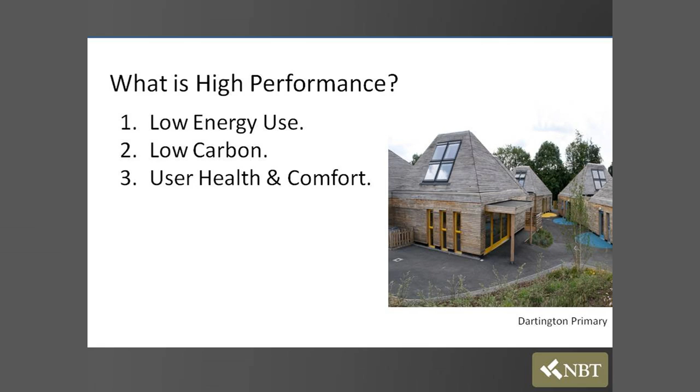So, high performance buildings. Maybe a good starting point is, well, what is high performance? That's a pretty good start. Well, NBT like to think that it's about low energy use, it's about low carbon, which we're kind of familiar with, but also user health and comfort, which often seems to be completely off the agenda. Why high performance? Pretty straightforward, as we know: rising energy costs and also legislation, two key drivers that are moving this forwards within our industry.

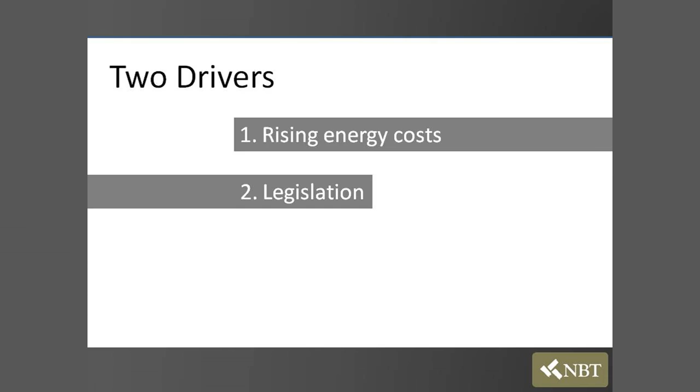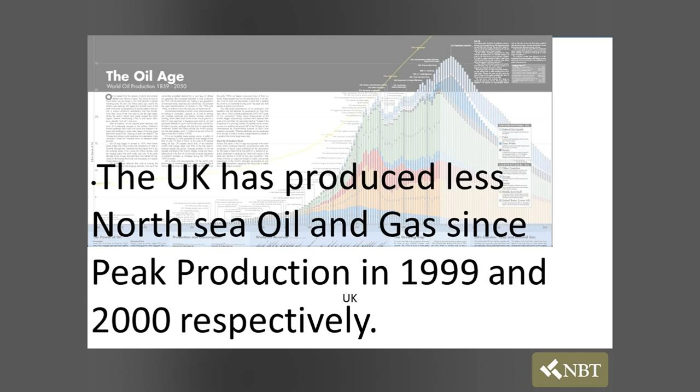Okay, so why rising energy costs? Don't know how familiar you are with the term peak oil or peak gas. So basically the UK has produced less North Sea oil and gas since its peak in 1999 and 2000 respectively. So it's 2000 for peak gas. Since then, we are now net importers of 60% of our gas. It'll probably be about 80% by 2020. Your average fuel bill will probably be 3 to 4 times what it is today by 2020. So a reasonably significant driver. Now fossil fuels deliver 90% of our energy, so it focuses us a little bit more.

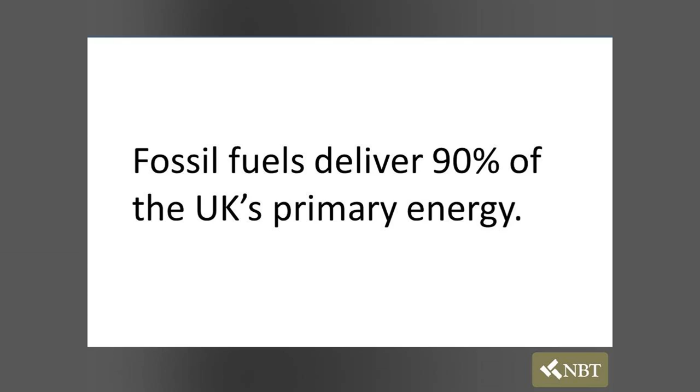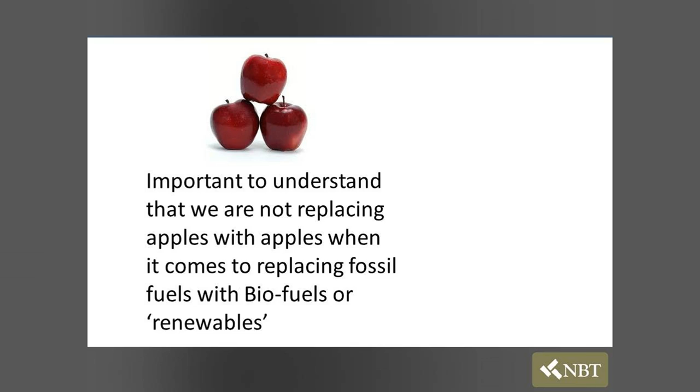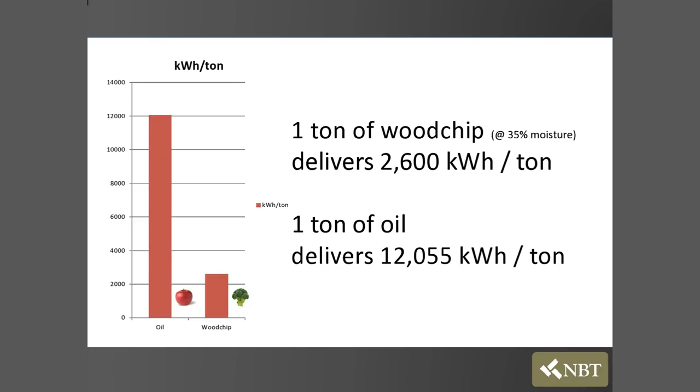But the trick with fossil fuels, and this is the mistake often made, it's important to understand that when we're replacing a fossil fuel with a biofuel, an alternative, maybe a renewable energy source, it's not quite the same as replacing apples with apples. Principal reason, give you a quick example. A ton of wood chip at 35% moisture, that's usually the moisture content of wood chip as it goes into a biomass boiler, delivers about 2,600 kilowatt hours of energy, depending on type or species. Oil's a little bit more per ton. To give you another analogy, the amount of energy in a single barrel of oil is the same as 5 men working non-stop for a year.

So what we need to understand is fossil fuels are incredibly energy concentrated, incredibly energy dense, and that's the trick that we often miss. So actually it's not a simple matter of just switching to an alternative, because there's not that level of concentration out there anymore. It's just a physics fact. It's not a technology issue as such, it's a physical fact because we just don't have that energy in concentrated form. I'll come back to that later.

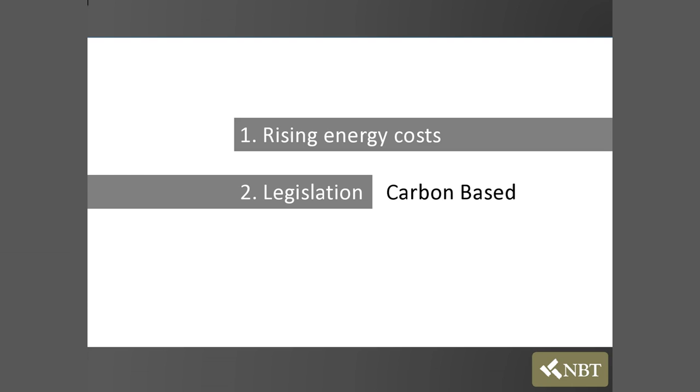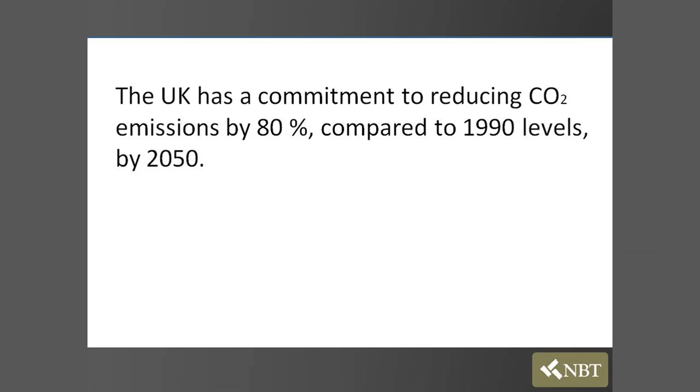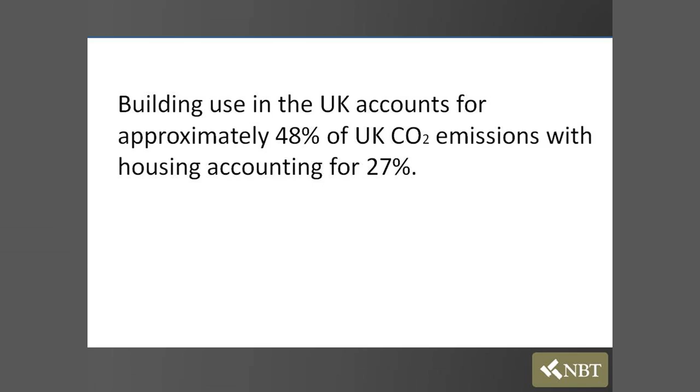Rising energy costs. Legislation: for whatever reason, the government's decided to go for carbon-based legislation, and the reason behind that is we've committed to an 80% carbon reduction by 2050, and we're in fact the only country on the planet that's decided to sign up to that on a legal basis. So we are legally bound, folks, to deliver that by 2050. And because the built environment attributes pretty much 50% of the CO2 into the atmosphere, it's the biggest hit, and therefore it's the biggest drive to deliver on legislation. There we go, 48%, was pretty close.

So we would argue, and I think you probably agree, these changes necessitate a new approach to building design and building construction, and that really we're in a phase of research and development. Now, you guys as architects and practitioners are probably a bit more familiar with thinking of alternative ways of solving a problem, but the reality is the construction industry is actually very conservative. I'm sure I don't need to tell you that. And the idea of change and research and development is pretty limited. The amount of research even on what happens to moisture within building fabric is incredibly limited. And legislation isn't exempt from this.

So BREEAM, SAP, Code for Sustainable Homes, which probably won't be with us much longer, Green Guide, etc. Important to understand, please don't use them as design tools, because they're also very much a work in progress. They're getting us there, they're useful as rough boundaries, if you like, to where we need to be headed, but they're changing all the time. We've seen companies get the rug pulled from under their feet because they've aligned themselves very closely with delivering, say, code 5 or 6, only to find it's changed when we hit the 2010 regs, and it's going to change again when we lose the code altogether. The FIT scheme, the feed-in tariff, is a very simple illustration of that.

The other thing that I'd flag up as well, probably could have done with a different slide on this, but I don't know if you guys are aware of what's called the performance gap. It's becoming more and more of a real awareness issue, which is basically, in simple terms, 50% of our new builds, and that's mainly domestic stock, actually fail their as-designed SAP in real energy terms. On paper it says it'll use so much energy, but in reality, it's failing. By 2016, the government is hoping to introduce legislation that will measure the actual energy performance of a building once it's actually built.

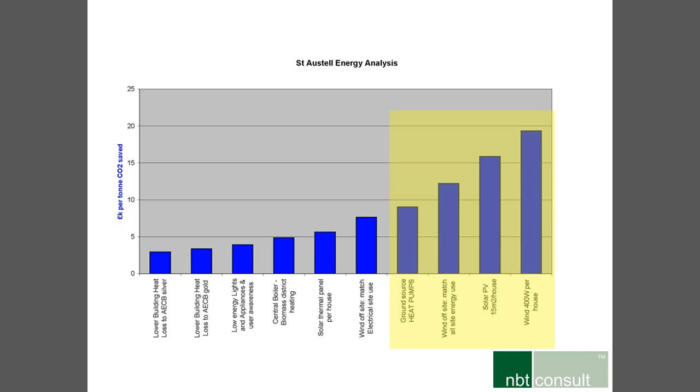Okay, and actually they're the most effective, frankly, at saving carbon. Next to that, low energy lights, user appliances, user awareness, that's a biggie. They don't save the same amount of carbon, but as a cost-effective strategy, it proved itself number three. And then we're getting into the kind of ground source heat pumps, micro wind, which I think most of us are aware of now, unless you're in the middle of a Scottish moorland, is a bit of a dead loss. And even solar PV. This has come down a little bit, but not as much as we think, which is again part of the reason why FIT disappeared.

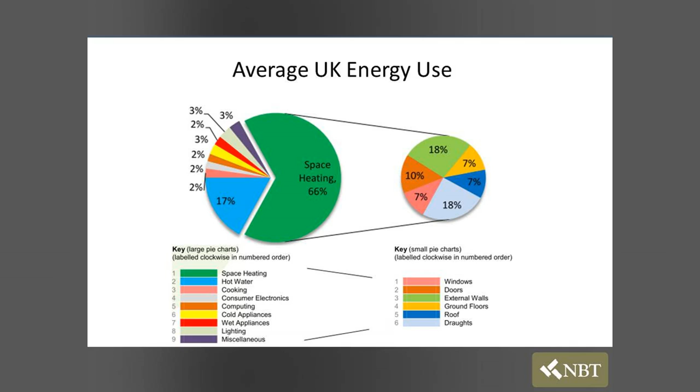Now the reason why those are so effective is simply because of this, average energy use in a domestic dwelling. Okay, so the vast majority of your energy use, 66% thereabouts, is actually space heating. All right. What I always find fascinating about this slide is we're always banging on about low energy lights, but in a domestic setting, actually it's only 3%. That's lighting down there. And of that, there's a further breakdown there. So you're seeing where it's actually proportioned to. So this is air leakage, external walls, so on and so forth.

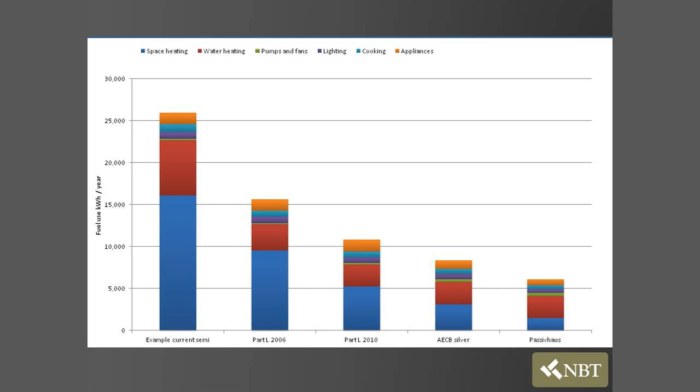And just to give us an idea of putting that in a bit of context in terms of what we need to do in delivering a low carbon strategy, but also really trying to respond to the fact that we need to use less energy, is where we are today. So this is a typical semi-detached property. The blue is space heating, the red is water heating. This is where we were in 2006 building regs. This is where we are today. This is where AECB Silver is, which was that slide I showed you earlier, and this is Passivhaus. So building envelope design, the fabric of the building, the shell of the building, has now become widely understood as the most effective route to low energy design and low carbon design.

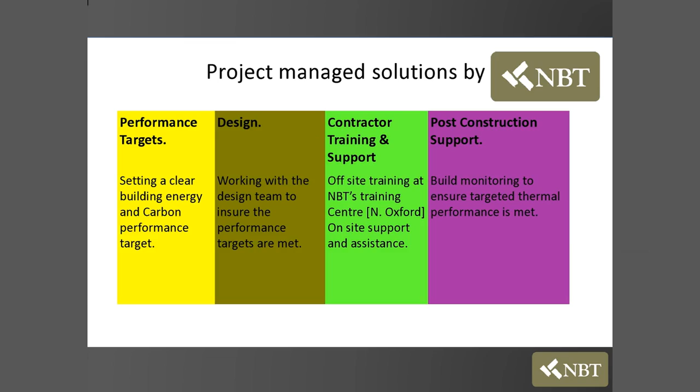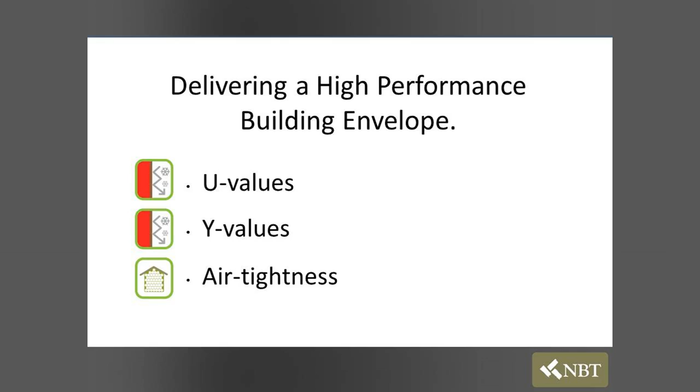So we've banged on about the importance of building envelope. Might be worth just saying what are the key factors to all of this. We think there's probably six as a starter for ten. U values, I'm sure you're familiar with that. That's the principal heat loss through building fabric. Y values, are you familiar with that? It's in SAP more now. It's basically the non-repeating bridging. I'll tell you about that in a minute. Air tightness: we heat the air, the air leaves the building, we lose our heat.

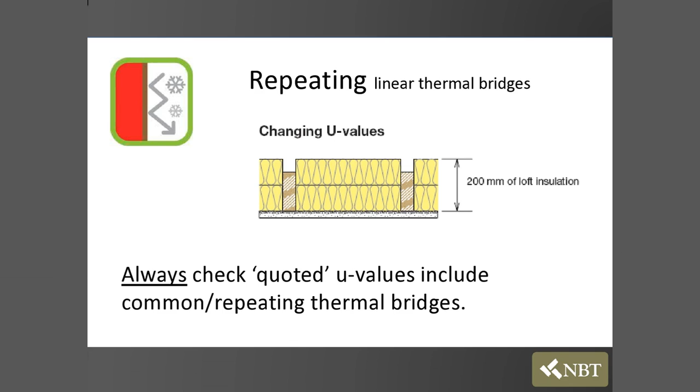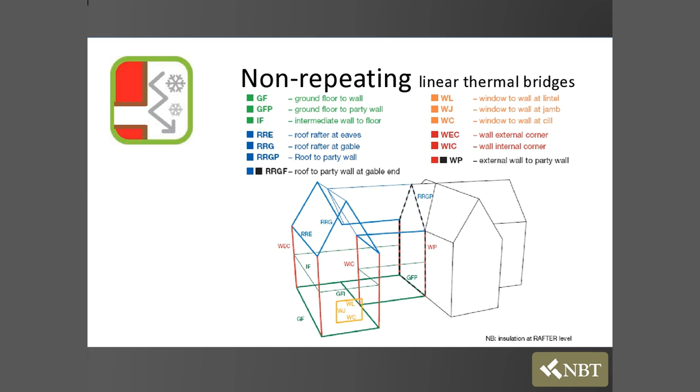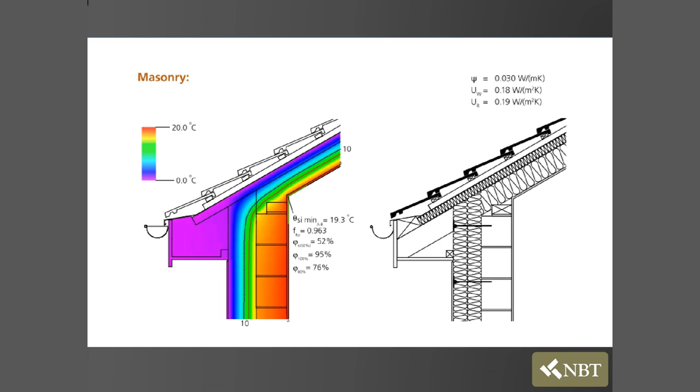Y values. Notional value, it's added to the U value and has become particularly relevant in SAP 2010, and has also, for us, catapulted us from being a little bit more niche in terms of sustainability to being directly competitive in terms of commercial cost viability, and I'll come on to why that is in a minute. These are all the kind of non-repeating bridges where you get junctions between principal fabric, and you calculate the Y value by taking a psi value, which is a two-dimensional slice through the bridging detail, and then you multiply. Actually, I'll come on to that in a second.

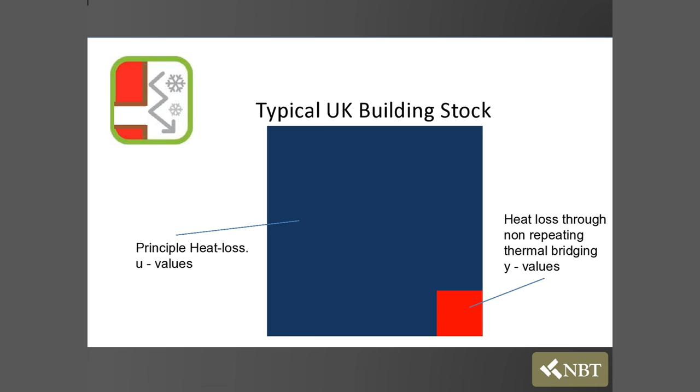The reason why it's more specifically important at the moment is this is the typical heat loss that we used to have. So this was the blue areas, sort of windows, doors, roofs, that sort of thing. The red area down here was the heat loss through the non-repeating bridging. When we get down to even Part L now, the 2010, our principal heat loss is reduced quite dramatically. So proportionally, our non-repeating bridging is suddenly much greater, up to 25% of your heat loss. So we need to now start doing something about that as well.

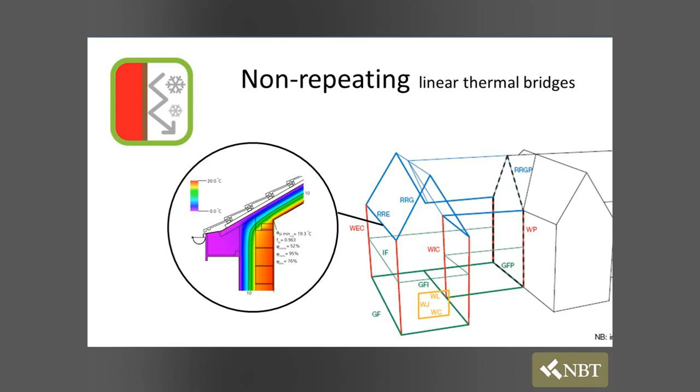And the way we calculate it, to finish my sentence from previous, you take a psi value, which is a two-dimensional slice through a particular junction. You multiply it by the length of that junction, and then you do it with all the other junctions. It takes no time at all. And there you have your heat loss. Ta-da!

So what NBT have done is say, okay, we are providing a system rather than a piece of material. Therefore, we can calculate all this beforehand. And then we can work with you on the design detail to help you understand how that is interpreted within your own design. And as a result of that, you can exploit much lower Y values. So to give an example, Part L at the moment, typical Y value is 0.08. So you're having to add 0.08 onto your overall U values. NBT system can be as low as 0.02.

So if you come to us and say, what's your wall build-up for a 0.2 U value? Well, another way of looking at it is you could actually increase your U value to 0.26 or thereabouts. SAP's a bit funny, so it's not completely exact, but it's thereabouts, because you're using an NBT Y value. So it's that advantage of using SAP in a much more effective way. So you're delivering the same building performance, but your wall has just shrunk in terms of width, which keeps the developer happy because he ends up with more footprint, and keeps the contractor happy because he's spending less money. So as a result, we've become much more commercially viable, rather than just the idea of, oh, it's nice sustainable materials.

I'd just like to say as an aside, the reason why NBT started off using natural, inverted commas, materials is not because they're warm and cuddly, although they can be. It's actually because they've got performance advantages that at the moment synthetics don't have. I don't know if any of you are involved in outdoor pursuits, but there's a product called merino wool, which is used in a lot of stuff like cycling and mountain biking and skiing, which is a brilliant base layer, as in it's the thing that's nearest your skin. It takes all the sweat away very, very quickly.

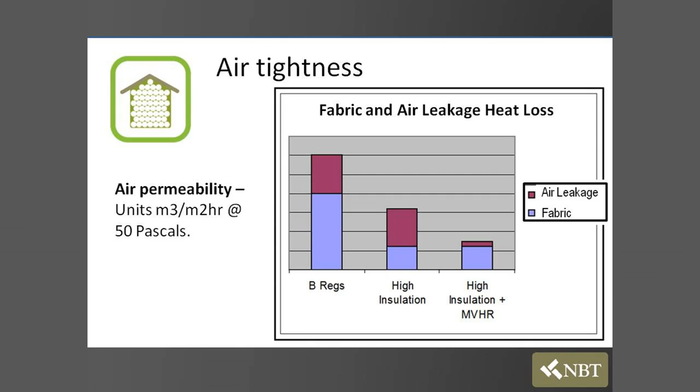to that shortly. Air tightness we talked about. Again, because you're reducing your heat loss, your fabric heat loss, if you don't do anything about the air leakage, then you're kind of beginning to waste your time. So we really need to start driving down the levels of air leakage out of a building.

And these two combined, high air tightness, which we can deliver because it's a system approach, and low Y values means, again, you can help to relax the U values that you've got in your roof and your wall and your floor and even your windows, which are often the very expensive part, to help you achieve the same performance, and we'd argue in reality probably more likely, because it's more of a joined up process, than if you went down the more conventional route.

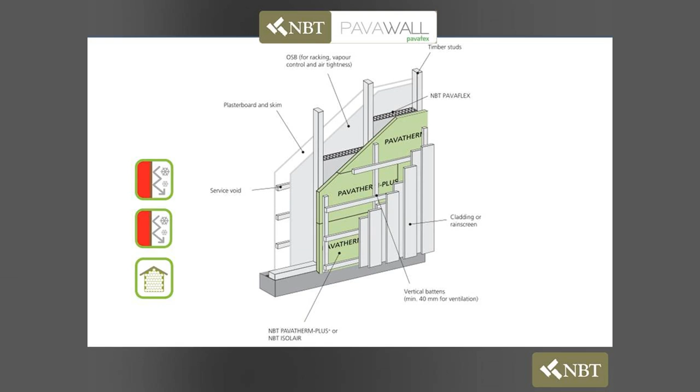That's a typical system. This is PAVAWALL. It has two iterations. It's either on a steel frame or on a timber frame. It's either clad or it's rendered, or you can build a brick facade up the front if you want, but that's unusual. It has all these three performance elements that we talked about, particularly because it has the insulation running over the outside. The boards are tongue and grooved.

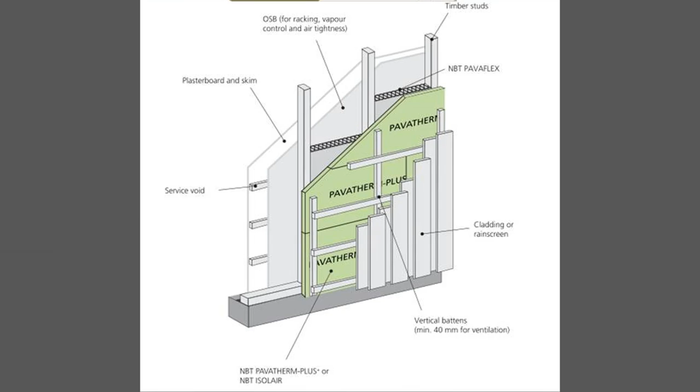They're easier to fit together. The waste is significantly reduced down to about 2 or 3% because of the tongue and groove and the fact that they don't have to hit centers of the studs when you're actually on site producing these. The waste, you can actually shred up and dig into the flowerbeds, which has been attractive to certain contractors in terms of getting rid of landfill.

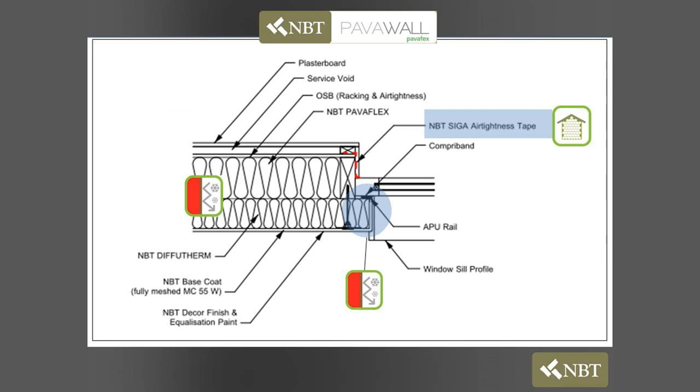And again, details where we're looking at air tightness detailing, principal thermal performance, and the non-repeating thermal bridging. Again, all details that we go through with you. That's the simple bit. Keeping a building warm in winter is generally fairly straightforward, but there's these three other dynamics we'd like to talk to you about as well. Health and comfort, about moisture control within the air that we breathe, fabric durability, and summertime overheating.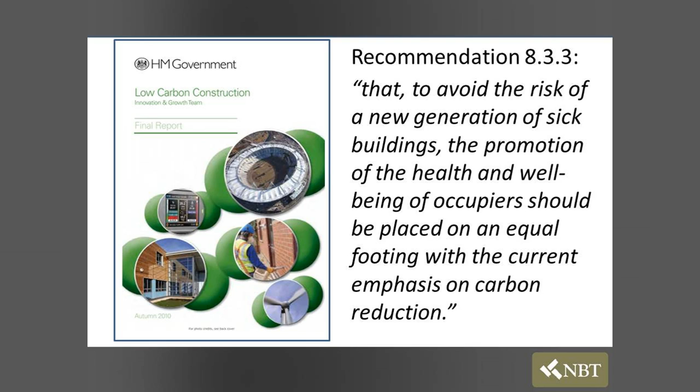There was a government report produced in autumn 2010 that said just this, that a new generation of sick buildings could occur if we don't deal with health and well-being of actually the building fabric and how we're doing with it. Actually, that perhaps this should be on the same level in terms of importance as carbon reduction.

Interesting graph. I'll try and explain it. You've got 0% relative humidity down there and 100% relative humidity over there. So this is the air we breathe right now. And relative humidity is obviously just the moisture content of the air. It's relative because of the temperature. So the lower the temperature, the less moisture in the air.

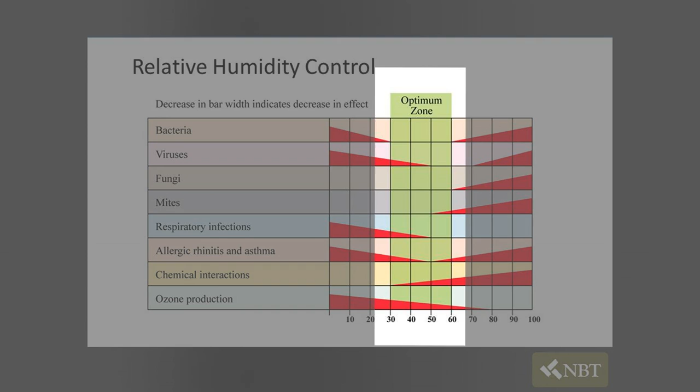You've got various types and species of bacteria, fungus and virus. They generally thrive at either 0 or 100% relative humidity. But they all tail off to almost non-existent at 50% relative humidity. Coincidentally, you and I are most comfortable at 50% relative humidity.

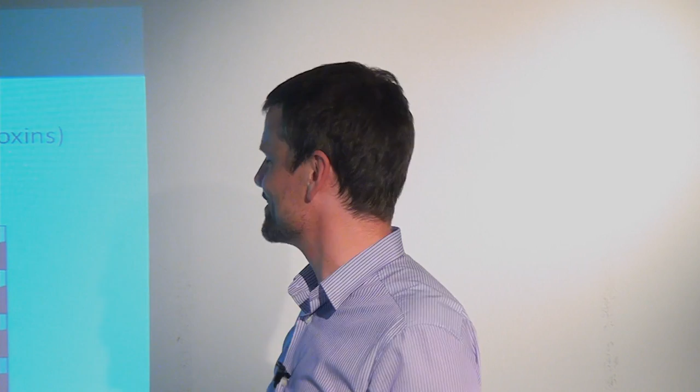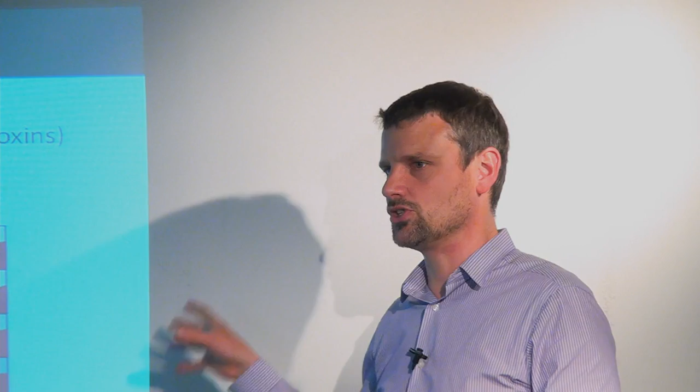Happy days. But it is interesting because suddenly we're switching from the idea that sustainability, so-called, and high performance is all about just low energy bills and ticking some carbon box, to actually producing a building that's far more comfortable to live and work in and far more healthy to live and work in.

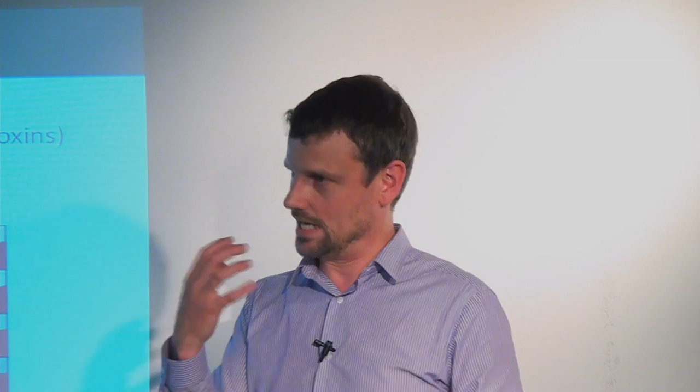We've had guys that join the company and they go into buildings that have been designed as well as this, and they actually change their expression on their face as they walk into the building and go, wow, that's quite something. And they're not looking at anything, it's just the air that they actually feel.

Fabric durability, moisture control. I'll use a timber frame as an example for this. Here we have a timber frame. We've got studs, cross-section from above. We've got insulation between the studs. We've got OSB on the outside. That's to stop the building getting blown over in the wind, for racking.

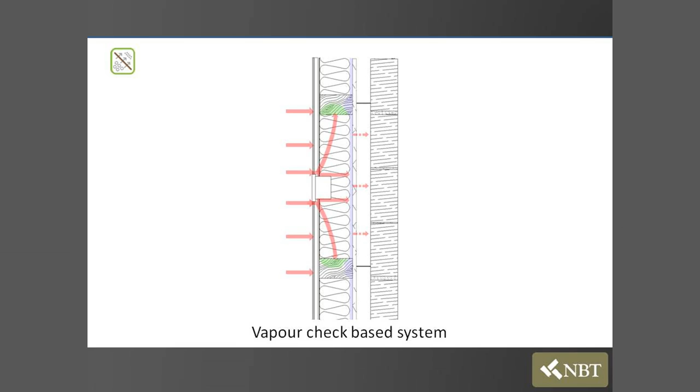Plasterboard on the inside. The moisture comes into the building fabric, and then because it moves through the insulation more quickly than it does through the actual OSB board, we get a build-up of moisture. So we say not to worry. We will line this building with a plastic bag to make sure that the moisture can't get in the first place. And that vapor barrier is, of course, fitted 100% correctly on site, and then it's never punctured in the lifetime of the building.

I'll leave that one to you.

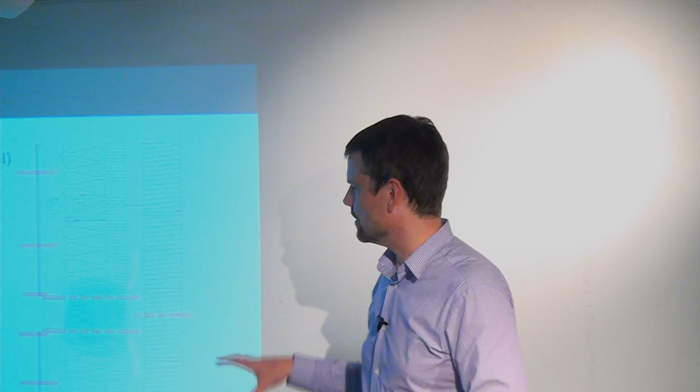What we find is that that doesn't usually happen. So what we really need is a system that allows moisture to get out more quickly than it gets in. So NBT systems, again, allow the moisture to get out once it's gone in more quickly. So in this case, what we do with a timber frame is we encourage getting the OSB board on the inside. You can then tape the OSB board, and that'll actually give you an airtightness barrier, so you're saving on membranes. Batten it out for a service void and then plasterboard.

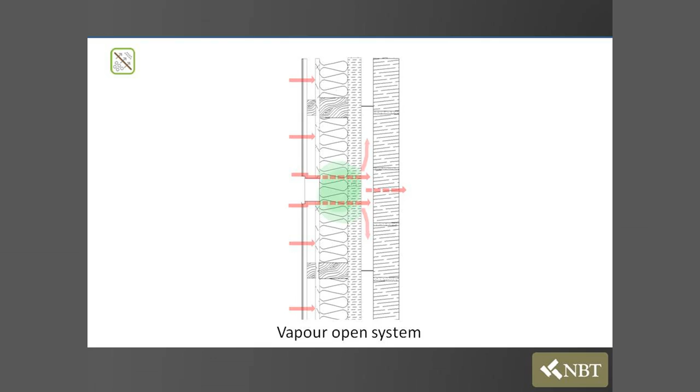You've then got an insulation between the studs, in this case Pavaflex, and then over the top you've got another wood fibre board, which was the tongue and groove we saw earlier. That whole thing is fail-safe for moisture. Okay? You cannot get an excessive build-up of moisture, principally because you have a heat differential between the inside over here and the outside over here. And so long as the least permeable is on the inside and the most permeable is on the outside, you will find that you end up with a vapour open or breathable structure.

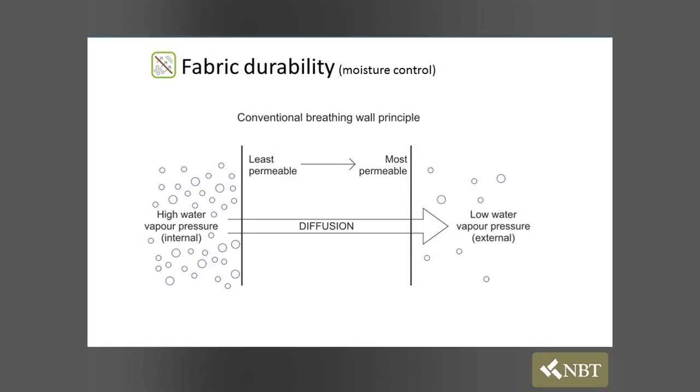In terms of NBT system, I want you to think of it slightly differently than just, look, here's a bunch of materials and you must use them in this order, in this way. It's more about a bunch of principles that we've been talking about here and actually bringing those to bear within a building and making sure the building physics works, rather than just, here's a piece of material, making sure that works.

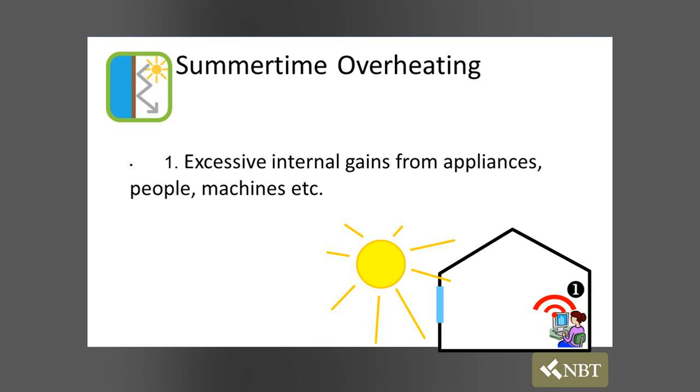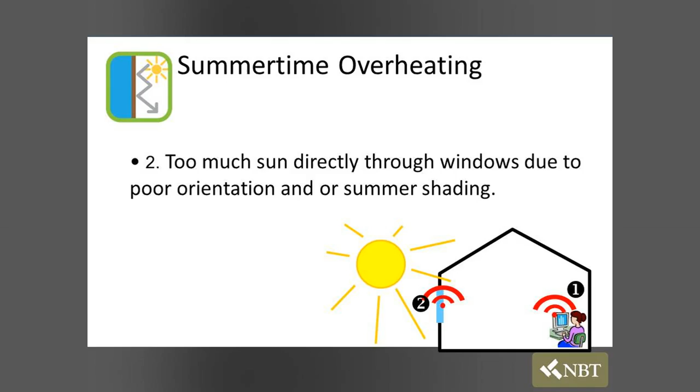Okay, summertime overheating. This is becoming a biggie as well. Three reasons why we get summertime overheating. Excessive gains from people and machines. That's usually more relevant to commercial rather than domestic buildings. Too much sun, okay, directly through the windows. That's mainly about building orientation. And east and west particularly, actually, that's a killer. People usually just think it's all right, I'll stick a brise-soleil on, but it won't work on east and west elevations because of the angle of the sun in the sky. So south, fantastic. East and west, not great. You're perhaps looking at vertical elements or just maybe smaller windows.

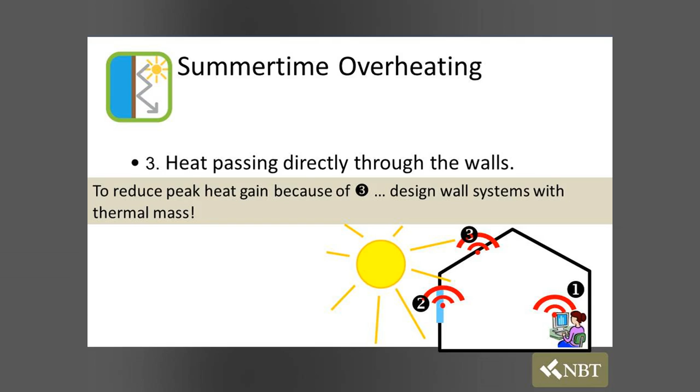This is the last one, which is heat passing directly through the building fabric. Okay, we've referred to this as the decrement delay. So on lightweight structures, if you've got a phenolic frame, say, within a given structure of a given thickness, then you might only have 3 hours before the heat energy from outside is actually permeating inside and heating up the interior of the building. An NBT system, same thickness, it'd be about 10 hours.

And the reason for that is because people say, hang on, the building's insulated. I thought it kept the heat in. Well, the amount of energy that the sun throws on a square metre of your building from the outside during the summer is vastly greater than the small amount of energy that your little boiler throws on a square metre of wall from the inside in the winter. So actually it pushes its way through the building far more effectively. So thermal mass is the key to keeping a building cooler in the summer. And the key way to introduce that into a timber frame or a steel frame, which has very little mass, is with a system approach that we've talked about, because they have very high thermal mass in them. So keep your mass high.

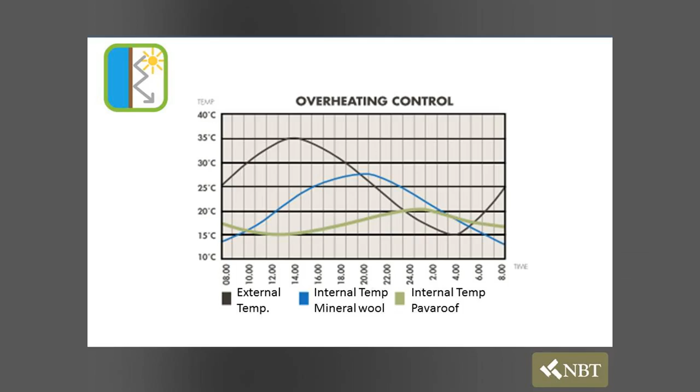So if you look at a quick example here, that's the external temperature, the black line, so we're going up to about 35 degrees, because it's very hot. And on roofs, that's not untypical; we forget that in terms of surface temperature, a black tiled roof gets very hot indeed. That's a mineral wool example, the blue line, and this is a Pavaroof system, where actually, by the time the heat's coming inside, it's pretty much about midnight, which is probably quite useful, but the level of heat that's coming in is so much less than otherwise.

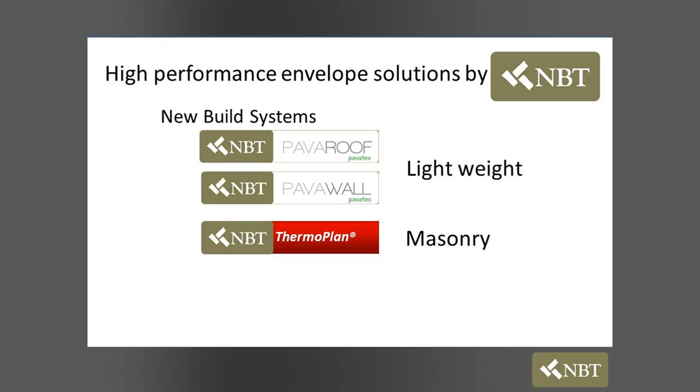A breathable fabric will not help control the relative humidity, even if it's very breathable. Okay, it might, but less than 1%. So for all intents and purposes, ignore it. It's all about ventilation, and it's directly related to your airtightness.

So you have a very airtight building. You need to make sure not only that it's ventilated at the right rate—the rates are much, much lower than the air leakage you've just prevented, so you're not defeating what you've just achieved—but you must make sure that that ventilation is throughout the building.

Good circulation. You might have the right ventilation strategy for the building, for the airtightness, but you've installed it in such a way that this half of the room doesn't get any airflow and that half does. Well, this will rise in RH and you will start having issues with mold and bacteria and all the rest of it. I should have said that earlier, but never mind.

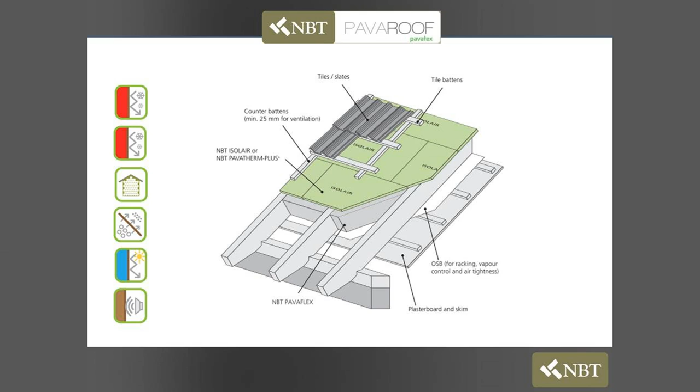So fully vapor open, again, tongue and groove boards. This has a latex coat impregnated into it, so you don't even need a membrane on the top here. And because of the nature of the system and the board itself, it's got a very high thermal mass, so we're really mitigating against that summertime overheating. Same with the boards, and there's some examples. It could be clad, which you saw a moment ago, or rendered.

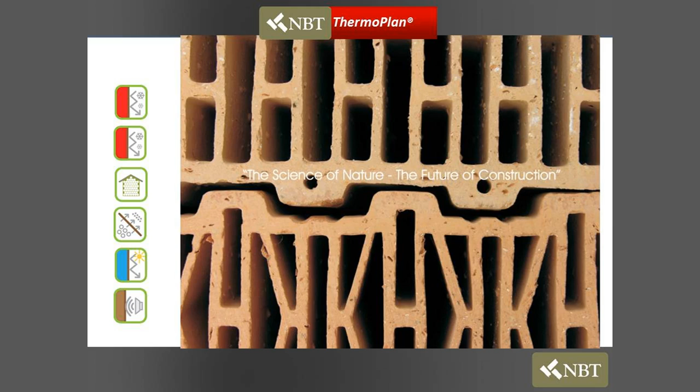This is Thermoplan. What we've got here is a simple monolithic block. That's the outside, that's the inside, that's the block. So on traditional masonry, you're replacing two cavity walls, ties, insulation you're trying to fit round the ties, cavity closures, all the rest of it. One block. It's machined after firing to within a tolerance of less than 1 millimetre.

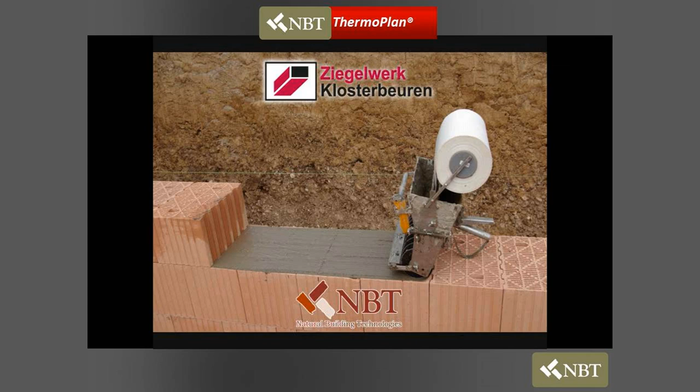Then you put the base coat down on about a 10mm mortar bed, but thereafter you're only having a mortar 1 mil thick, and it goes on with this hopper here. It either comes with mesh or without mesh. Without mesh, you're looking at runs up to about 25 metres before you need expansion joints. With mesh, about 40 metres, so reasonable lengths.

There's no mortar in the perps, so it's actually a very quick build, as you can see from the video right now. It's up to 4 times faster than conventional build, and really delivers on the performance. You put plaster or render on the inside and the outside. You can clad it, but you need to put at least a parging coat, because then it delivers excellent airtightness. So it's very much this systems approach again.

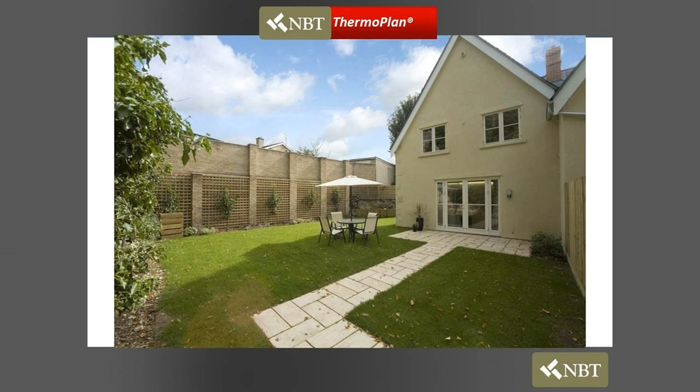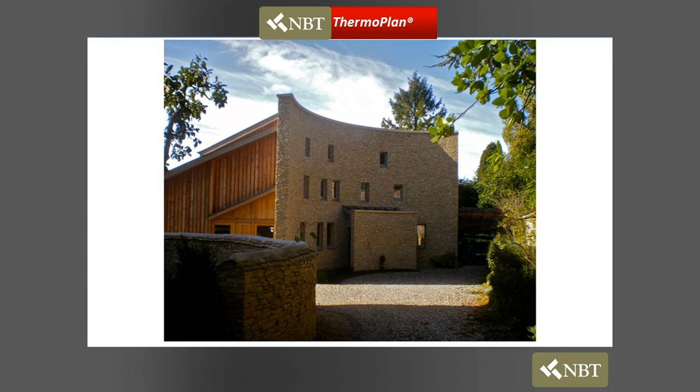That's a typical use. That's in the Cotswolds. It's actually got stone clad on the other elevations, which you can have against it. You don't actually need a cavity unless it's very vapor closed granite or something. You can produce other iterations. It doesn't have to be a square monolithic block, or you can hybrid it, as in One Brighton, where the Thermoplan was used in the concrete frame, and then it was run over the outside with Pavawall and then rendered.

So coming into land, we talked about the systems, the project managed approach, and the elements that we'll bring to bear on a particular scheme. So if there's a particular scheme that you want to engage with some of this on, or just explore as an idea, then give us a call, and we'll initially talk about the performance target. What are you trying to achieve here? Is it building regs, or all the way up to some passive house standard?

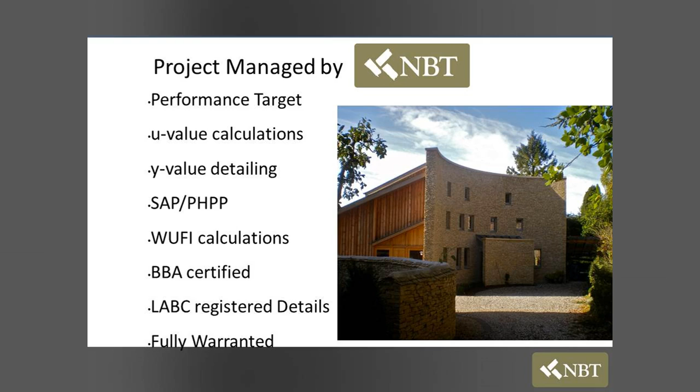We deliver both on a regular basis, and because we've got this joined up process, we're delivering £1,000 a square metre built cost in Dorset for Passive House. That's quite unprecedented, and it's particularly because of this joined up thinking approach. U-value calcs, standard issue. Y-value detailing, we've talked about that. We'll actually do your SAP and your PHPP assessment if you want.

Or we'll work with the SAP and PHPP assessor to make sure they understand how to gain the best advantage of the system. That's particularly relevant in SAP because it's not quite as clean as PHPP. WUFI calculations, making sure the building fabric is really going to deliver. BBA: because it's a system approach, we've got all of them certified by BBA, apart from the Thermoplan, which has passed the affectionately termed kiss of death test but has yet to receive its final approval, which we're told is fairly imminent. They've all got LABC registered details, and of course they're all fully warranted.